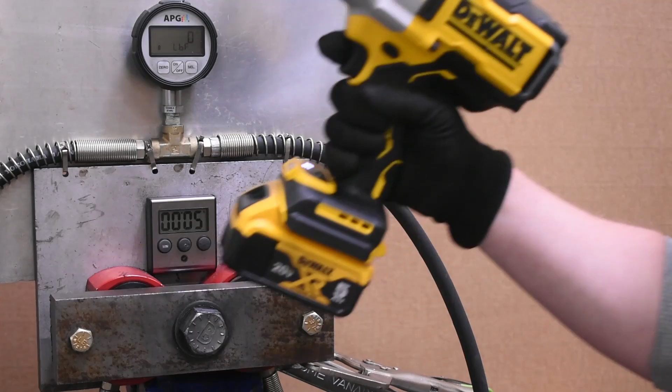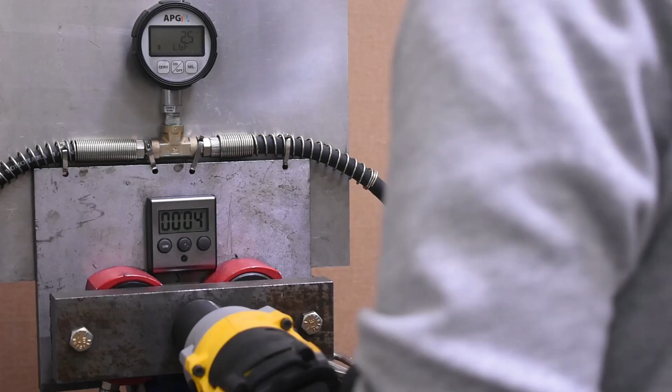This is not a DeWalt tool that's currently out in the market, or even a DeWalt tool that has been announced or referenced to. And yet here it is in all of its chunky goodness. Well, let me explain. Nearly a year and a half ago now, we hinted at the existence of a future, quote, Project Honey Badger 2, a mid-torque impact we found on the UK DeWalt page registry that was then deleted.

And we later got the DCF891 mid-torque. That thing is a beast, a top dog mid-torque. We also previewed a, quote, Project Bruiser 2 DCF900 high torque. That has more recently come out, and man, that's another brutally powerful high torque to top the charts.

At the same time, well over a year ago now, we left this pinned comment about an even more undercover Project Ludicrous DCF961, a reliable source hinted at. I came away then with the assumption it would be either 3/4 inch or 1 inch drive as an impact goes.

Now flash forward to this month, this popped up in a DeWalt Facebook group saying DCF961, showing an impact shape these eyes have never seen with specs like 1600 Newton meters, that's 1180 foot-pounds tightening, and saying 3/4 inch, but that's clearly a 1/2 inch anvil on there. This post was deleted that same day, but how does this guy have a tool not even announced yet? Maybe a field testing sample?

We were unable to get in touch with this person, assuming they're still with us, but in our pursuit of it, with our feelers out there, we were able to, through back channels and after changing several hands to get here, get ourselves a couple days with this. Says DeWalt on the side, allegedly DCF961, Project Please Don't Sue Us Ludicrous. That definitely is 1/2 inch drive. And I'm here to tell you, it's got all the right stuff.

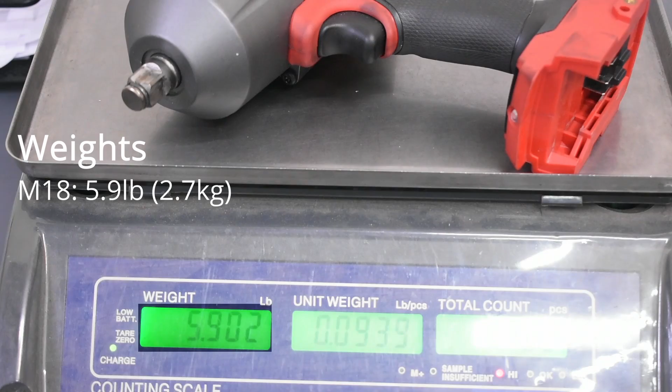This thing is heavy. An M18 high torque is 5.9 pounds. The outgoing DCF899 DeWalt high torque is also about 5.9 pounds. The latest DCF900 is 6.46, thanks to mainly a new hammer assembly. This new guy, it's 7.78 pounds.

7.8 pounds. The Snap-on CT9050, which is the same 8.2 inch length and known for being chunky, is just 6.2 pounds. The larger CT9080 from Snap-on, that is sort of the chunk king, and that's 9.6 inches long, well, yeah, that weighs less, 6.7 pounds. So heavier and has a larger diameter usually means a bigger hammer, stiffer spring.

It's got all the same push buttons that you'll see on some newer DeWalt models, even the timber screw mode that seems to behave in the way you'd expect from a DeWalt. And the top speed mode in particular sounds odd.

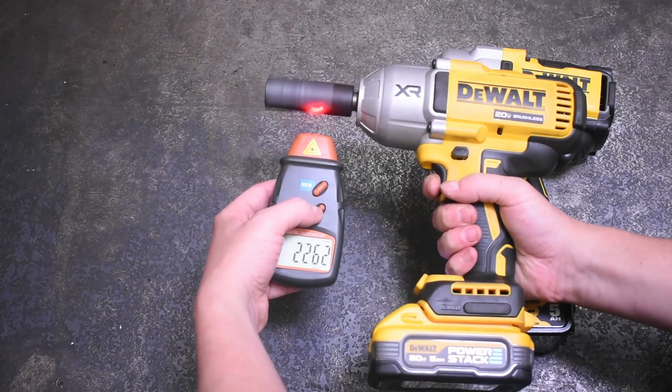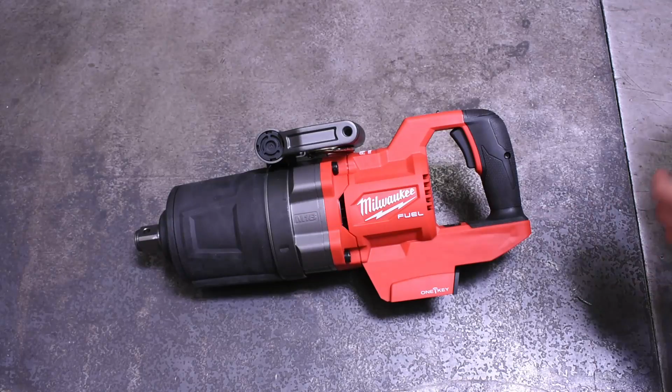A lot of air coming out of this one, like it's really working a fan, but not a lot of anvil speed. The latest DCF900 spins at about 2200 RPM, which is high, but still very high torquey as the specs go. This yellow example we happen to come upon, it's just 1200. 1200 RPM? That's the RPM of this thing. It sounds like maybe a bad spec to have, and for shorter time tests, maybe it is, but this means business. This is how I design a cordless high torque.

Lower RPM indicates that it has been geared way down to be able to sufficiently drive what's got to be some hammer assembly up front. This size of brushless motor needing to be nearly twice as gear reduced as a DCF900 to run what's inside. Dang. On the lever end of what that spring is going to be shaking against, we see some serious battery damping designs. We'll try to take a closer look at this. But first, let's get into the beans, shall we?

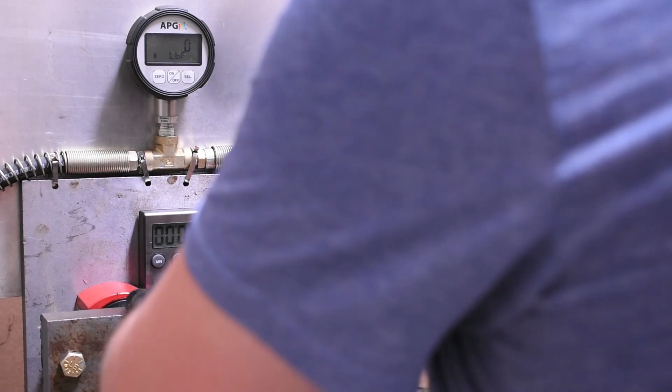We test these things with 5 amp hour batteries because that's what comes with them in kits, but we have no idea what a tool like this would be sold with, so we're starting here, which makes for a good comparison to start out with, I think. Our first test is called Working Torque, 5 seconds and forward. Here's how the DCF900 high torque does over a Milwaukee 2767 as the baseline. 647 over 572, two real beasts at this sort of thing.

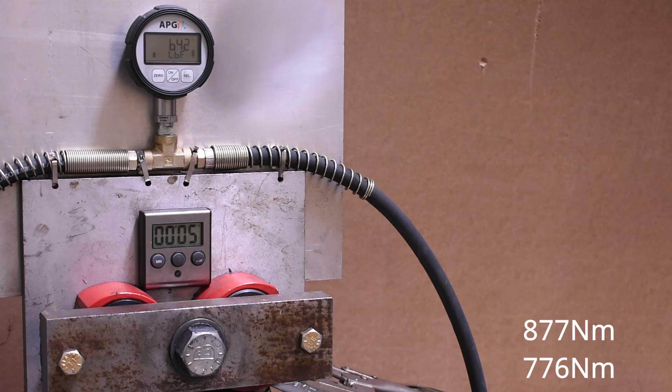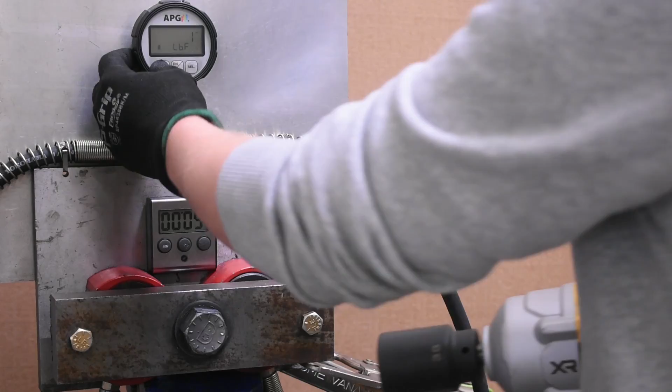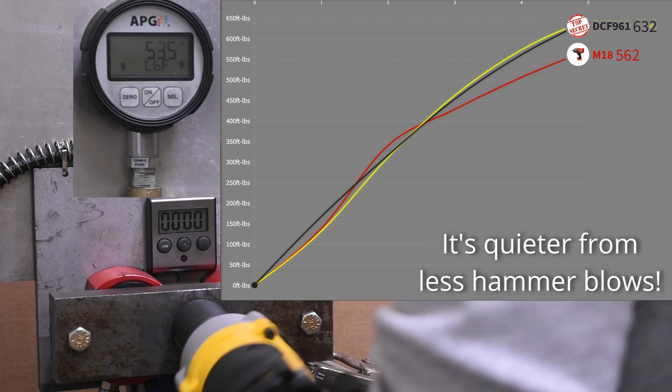Now with 1200 RPM, our new yellow friend we knew would be at a disadvantage in a 5-second test such as this. It's got some serious momentum to it. You can feel that even in free speed, but going to be hitting near half as often here. 632, that's pretty darn good.

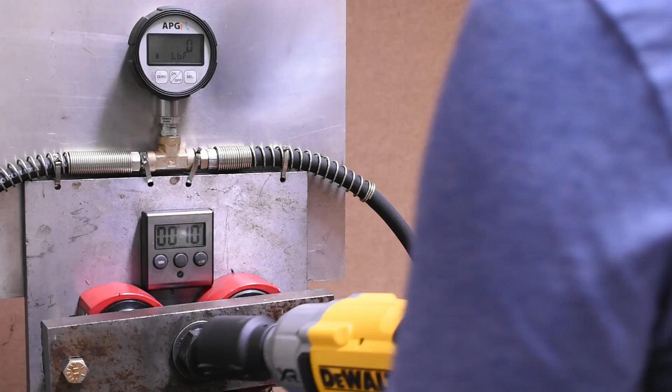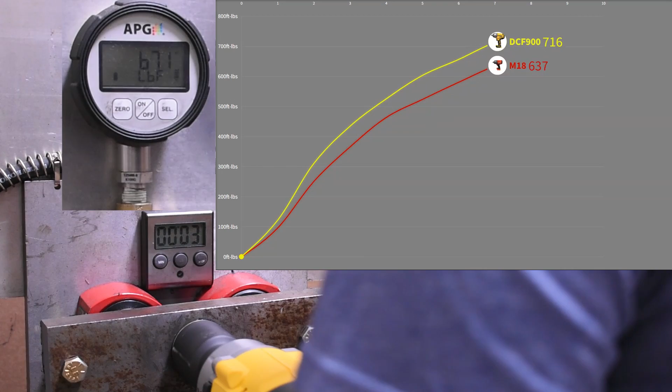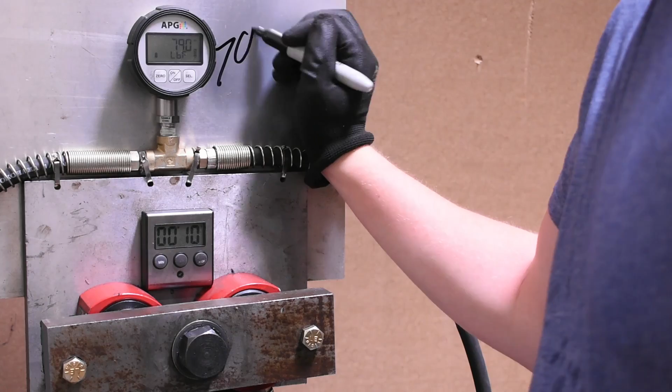I'll take that. Let's hop into reverse though, 10 seconds of it to replicate a 50-plus-year-old impact testing standard called max torque. Here's the 900 and Milwaukee again. 790 from that DeWalt on top of 728. It's hard to impress upon you enough how much of a beast this 900 is. People might be watching this and saying, these are weak. My impact says 1300. Yeah, that's sort of what's written on the box. These are hard fought numbers here.

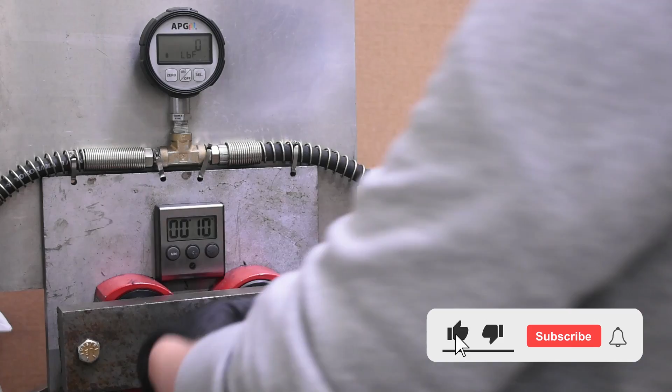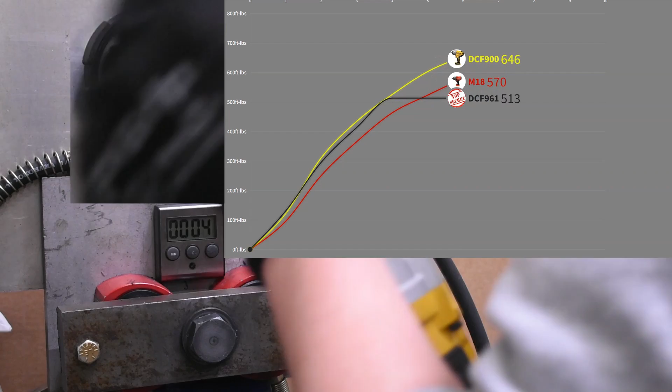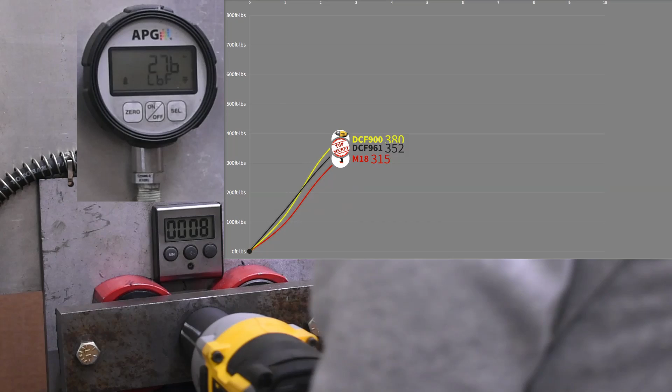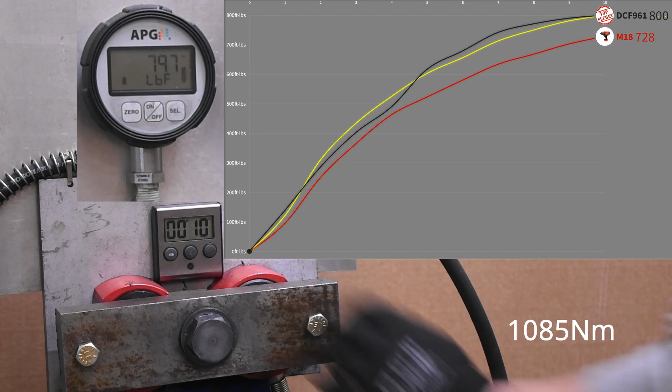Here's the shorter, chunkier, Ludicrous-ier model. Yes, in a very DeWalt sort of way, this thing is a handful and just popped off the bolt head. A very yellow tool thing to do. All right, here's this complete run. See if you can hear a difference kick in sort of midway through this run. Okay, so yes, 800 foot-pounds, barely topping the 900, all right. But that's not the story here.

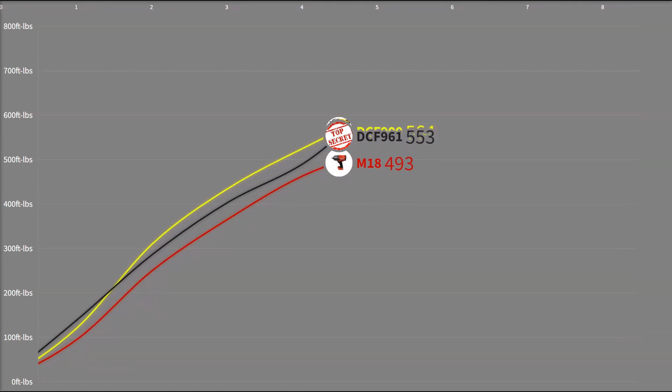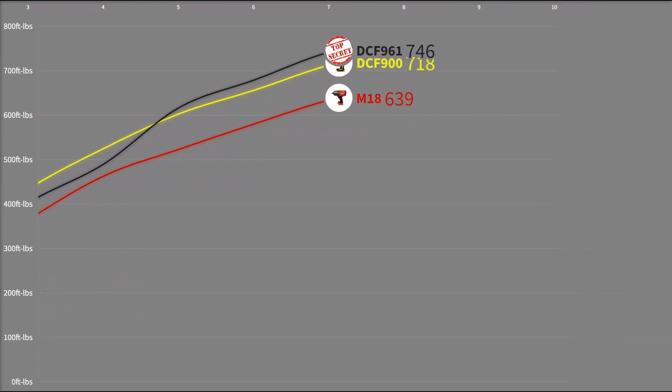This thing has like a turbo mode that kicks in 4, maybe 5 seconds into impacting, or possibly once things are just that tight. Check this out. It's slow playing us. This is what caused the tool to jump off when we didn't anticipate this. You can see this on the dyno graph as well. Both in IPM and power in general just seem to pick up suddenly halfway through the run. I'm really curious if and when this model is on sale, if this is an advertised feature, something they programmed in as a hidden function, or if it's just a lucky byproduct of some sort of design.

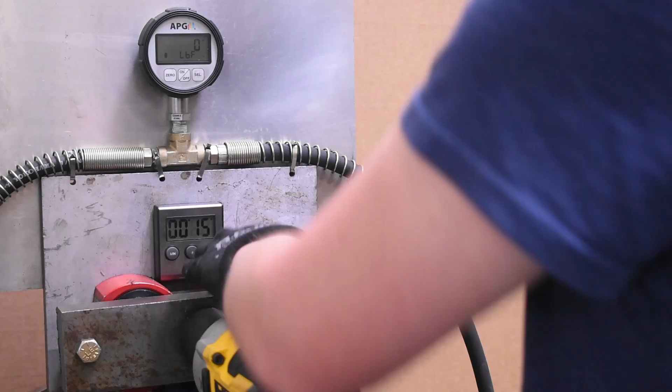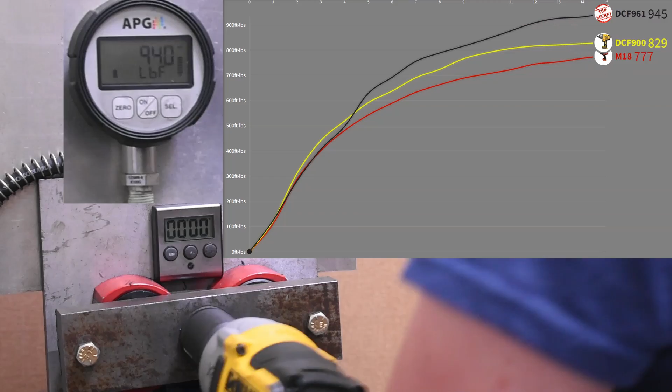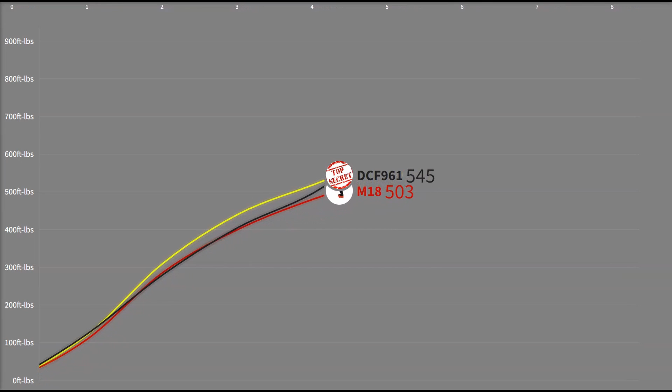All right, on to our best case test, 15 seconds, enough time for the odd model to stretch its legs now. Let's see them all on screen. Yes, 945 with a standard 5 amp hour battery. Over 100 foot-pounds on top of the DCF900. Slower hits means higher dynamic torque force per blow, which at the top end here is where each of those big hammer hits make significant progress over another faster tool's slight incremental but quicker hits.

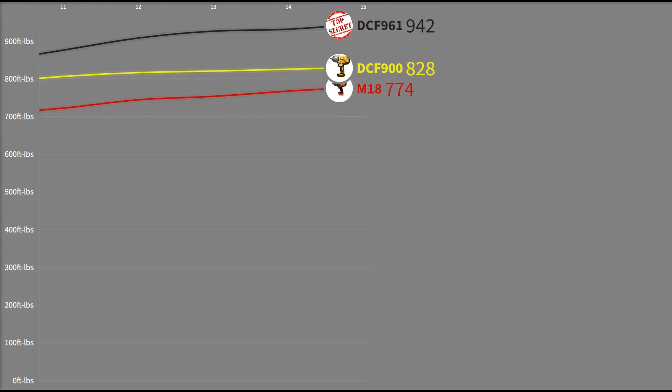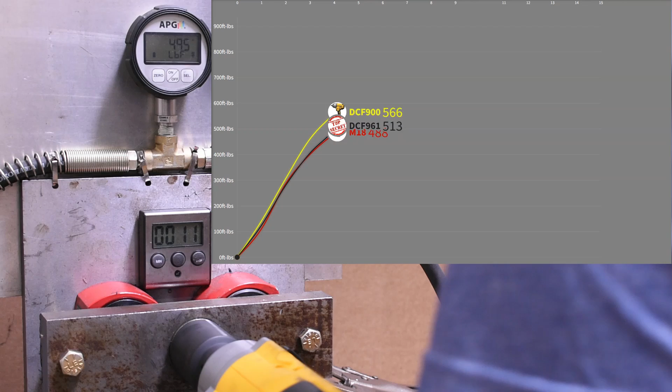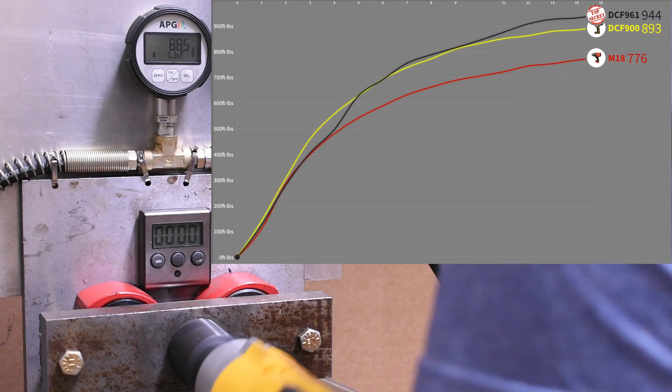Now the keen-eyed among you might be like, wait, DCF900 at just 830? Well, if you'll remember, the DCF900 made its best numbers in forward, not all that rare, but a good difference in this model's case. Here's the best the 900 could manage in forward versus the sort of Thor hammer looking tool in reverse. Now this, even though it's showing versus reverse, makes it look closer than we think it really is. Check this out. Here's the new guy removing 970 foot-pounds on a reverse threaded bolt. So we're going forward here. Let's take a look.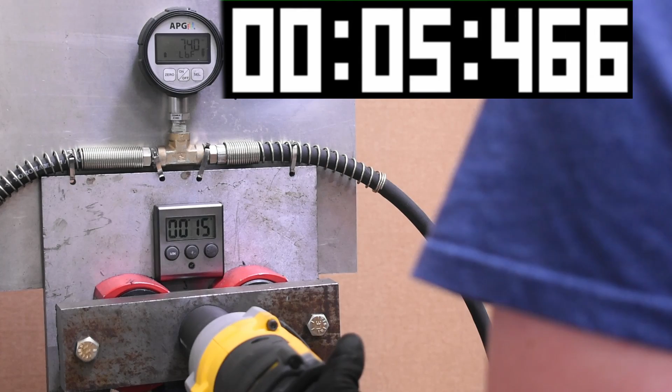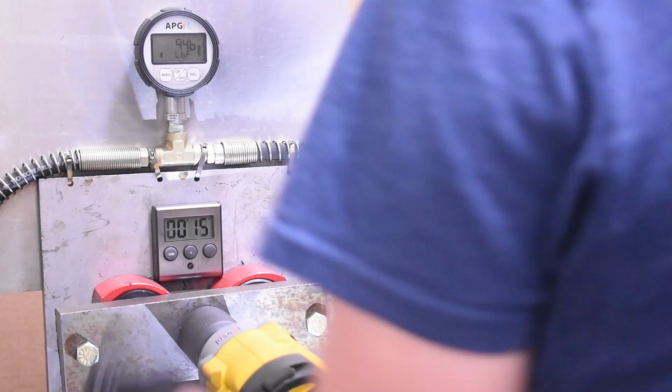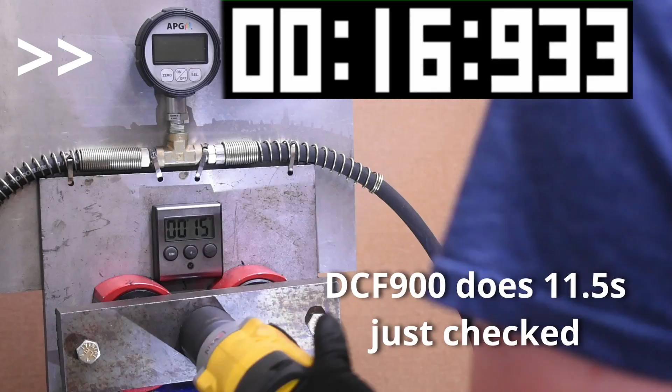8.3, 8.4 seconds. Well, actually, this is just the first bit of it because it gets sort of stuck and jammed here on the socket. So here's it doing just the rest of near 950 or so. I feel realistically this should be a 3/4 inch impact. Maybe that's what we'll ultimately see it come out as.

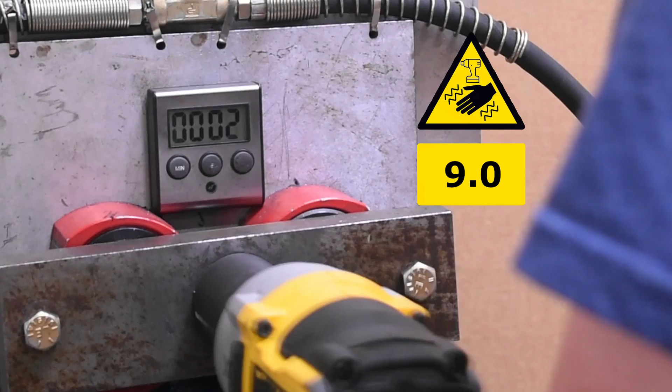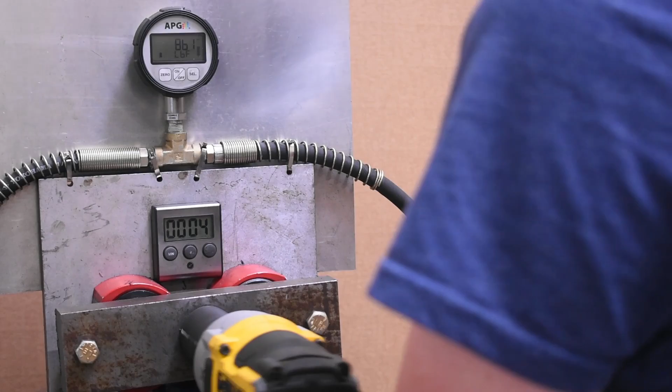This thing ties for the most rodeo bull-like wrist-breaking score we've ever given, a 9 out of 10, and that's because it very much behaves like other DeWALTs we've tested, just ratcheted up a bit. It's click-clackety as all heck, and a handful at times, especially at higher torque, and depending on how you hold it in a 6 to 12 o'clock angle orientation, it makes 30 foot-pounds more or less, like no other brands do. And a lot of what solves that, in our experience, would be a 3/4 inch drive.

We might be at the very limit of what a 1/2 inch drive can do here, just in a handheld tool, as it's constantly trying to kill sockets, your arm, or I'd guess even that anvil. So if we do see this shape of an impact for sale in the future, curious to see what options it will have in drive size. Maybe there's unmarked 3/4 inch drive versions out there in the world floating around, who knows.

For now though, we do have some stats, so let's rank this thing. We've done it before on question mark tools, so here it will just sit until we know for sure and we can buy a future model. It makes a stupid amount of torque and gets rewarded for that with 64, 80, and 95. It's only 8¼ inches long, which here makes for 114.8 foot-pounds per inch of working length, a cordless record overall on the channel. So whoever made this tool, they have some sizable R&D budget, we'll say.

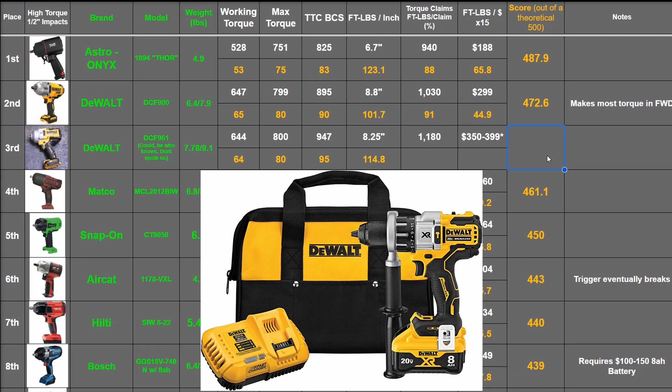Based on previous rumors and a Facebook post matching that, it very well may claim 1180 foot-pounds of tightening, so Ludicrous being above the bruiser here makes some sense. However, we don't know what battery they are going to require for this tool. Let's not forget the Bosch Profactor is up here, partly due to requiring a Profactor 8 amp hour battery. Maybe this will do similarly, their DCD998 drill does, so it would make some sense if they finally did it on an impact. Due to this could be around 84, or maybe we'll estimate up to 92 of advertised.

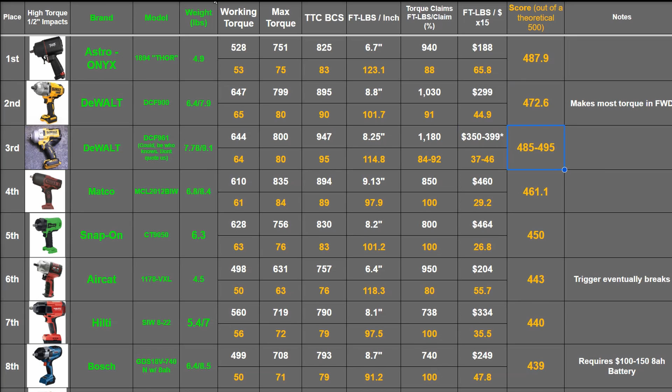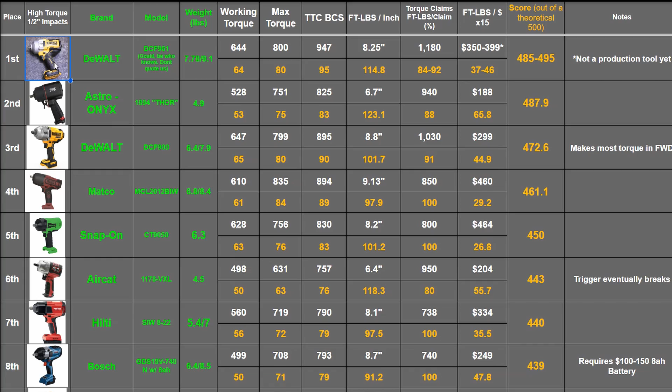A model we can't buy, you can't buy, heck, you can't even get an image of this from the interwebs. It's the best thing since sliced bread somehow. If you have a strong right arm to not notice hefting this around all day. But that's sort of the beauty of it. This isn't made for all day use, in my opinion. You pull this out when things need to disintegrate. Do we need this kind of power? At times, yes. Yes, we do. Do you? That's up to you.

But I certainly appreciate a design strategy that says to me, lug nuts are 33mm and crank bolts are only made by Honda and Freightliner. Leave the little stuff to the little guys. Not every high torque needs to be able to do it all. It's saying point me in the direction of what needs to come out, and it will be out.